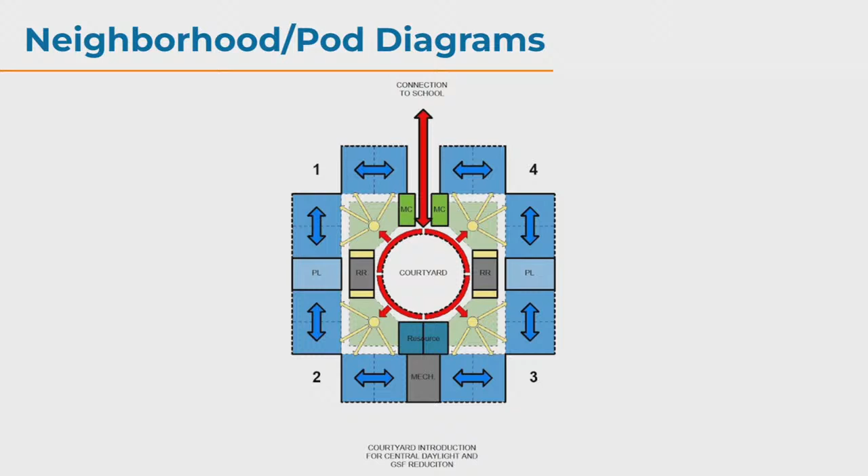So as this has evolved, we focused on trying to get things in their right size. We've got some science labs located, 1 per pod, so it's really a team teaching model. We've got interdisciplinary teachers, students working all in their pods. We've honed this through the process of design.

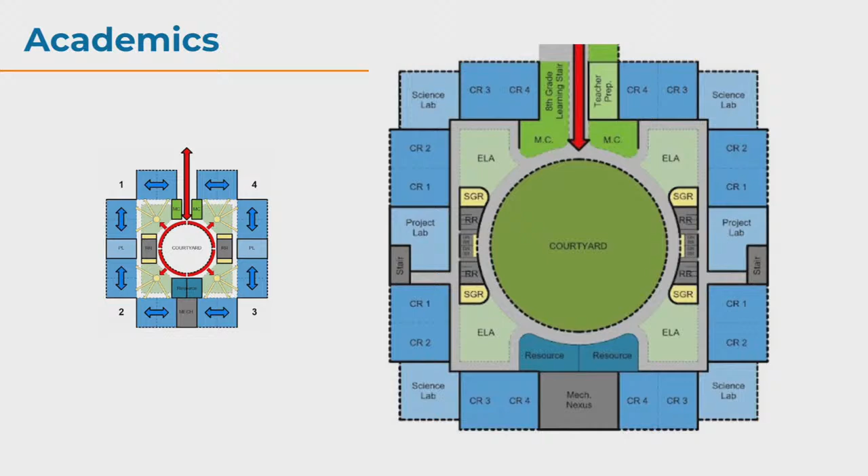You can see this is kind of where we're at right now, and I'll toggle back and forth to see how the diagrams have evolved. But you can see that we maintain the basic organization, the square shape.

As you zoom in on the 1st, 2nd, and 3rd floors, we can see we've got the 4 blue classrooms there, including a science room on each of the corners. Our science rooms are standard sizes for 6th, 7th, and 8th graders all the way up. It makes it really easy to stack, and really flexible in the event that we want to move the 6th grade from the 3rd floor down to the 1st floor in the future. We've got the flexibility for that future ability for them to grow.

Some of the things that we've done in terms of anticipating potential growth in the district is enlarge the resource rooms. Those were previously programmed at about 600 square feet, an OFCC standard. We've enlarged those so that they're a standard size classroom.

That will allow, if we have a bubble in terms of the student population when they come up through elementary school, that if they come in and we exceed that 120 student per pod group, we can have that additional classroom dedicated for an extra large class, and those students will be able to move through 6th, 7th, and 8th consistently all through here. So we've designed some things like that will allow the building to be a little bit more future-proof, that it will grow with the students and the student body as they grow.

Because of the way we've organized these with the pods, we're trying to embrace this teacher collaboration area. We're working such that the teachers will have their classrooms, and that's something that's going to keep evolving as we go through the design development process. But we also want to make sure we have a teacher collaboration space, a space for the teachers where they can get outside their classroom and work together, especially as we think about this teaming model and team teaching and project learning.

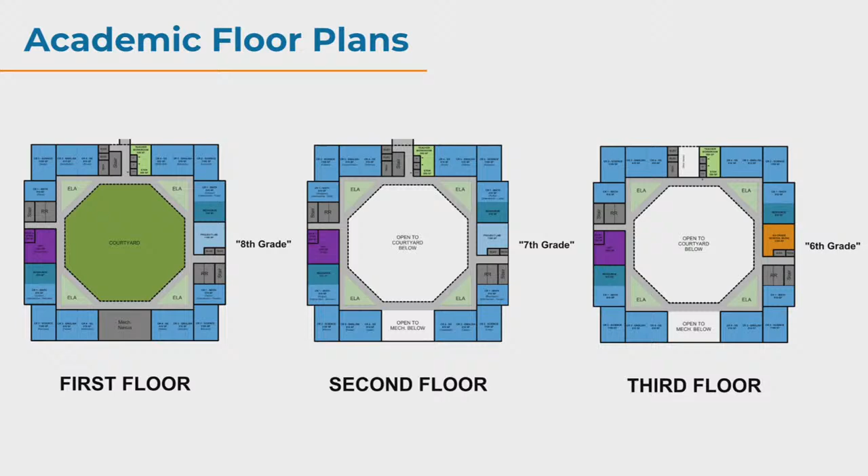This is how the academic areas fit within the overall floor plan. You can see that we've got the academic areas organized on one side with these connectors that connect to the common spaces on the first and second floor. On the second floor, we've got our elective spaces. So these are all of our general education classrooms: math, science, social studies, history, language.

All of these spaces are more of our electives, so we'll have foreign language, robotics, and other spaces located here for all 6th, 7th, and 8th graders, so they'll have the flexibility to go there. These being located on the second floor means that whether they're coming from the upper floor where 6th grade is or the lower floor, they really only have to go to one floor to get to those electives, so it's pretty convenient and easily accessible for everybody.

The green spaces located in these corners are our media center spaces, so those will be more open spaces for students to do research, collaboration, projects, access to book resources, digital resources, anything they need, in the media center spaces at the top. There are some stairs that will connect down into our dining space right in the center here, so those will be easily connected. The students will have a lot of flexibility to go from the lower level where the dining is, even if they're not dining in the middle of the day, they'll have access to this whole large open space.

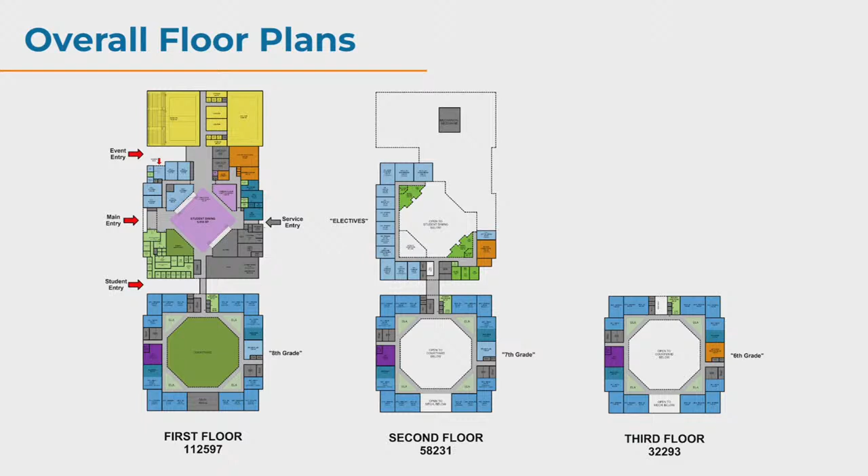Does that make sense? Okay.

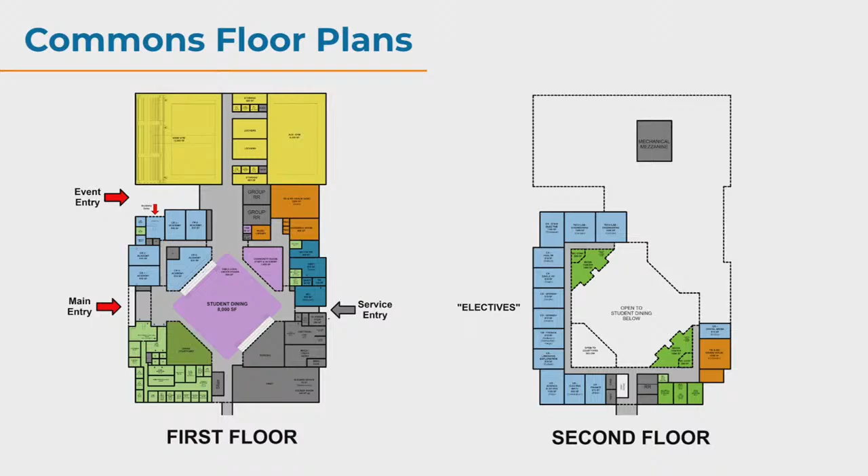So as we zoom in, we can see a little more detail here. These are still just diagrams. We have a whole production model that has all of our doors and windows and everything starting to go into it. You can see a little preview here of that model relative to the existing campus, and these are just rough extruded blocks for the existing high school and the existing junior high.

So this is really mostly just to give a sense of scale. As Charlie mentioned, this is a big building. It's going to take more than 2 years to build.

At a little over 200,000 square feet, it's a big building, but we've designed it so that it's off of the main street, tucked back in. We'll have access to parking, and our play fields and stadium are right behind here. We're going to have some existing parking here that we'll maintain. Some practice fields will go in place of where the existing junior high is once that's abated and demoed.

In Charlie's schedule that you saw previously, it starts in 2025 and will go for about a year before this building is abated and demoed and replaced with play fields and parking. So this gives you a little bit of an overview of that.

As we zoom in, you can start to see fenestration patterns, windows, because of the construction conditions we're dealing with right now with budget concerns. We want to honor the budget we've set for us, so we're being very mindful about how big the building is, trying to keep things as tight as possible. We're trying to make sure the building is very efficient, both to move through and to construct.

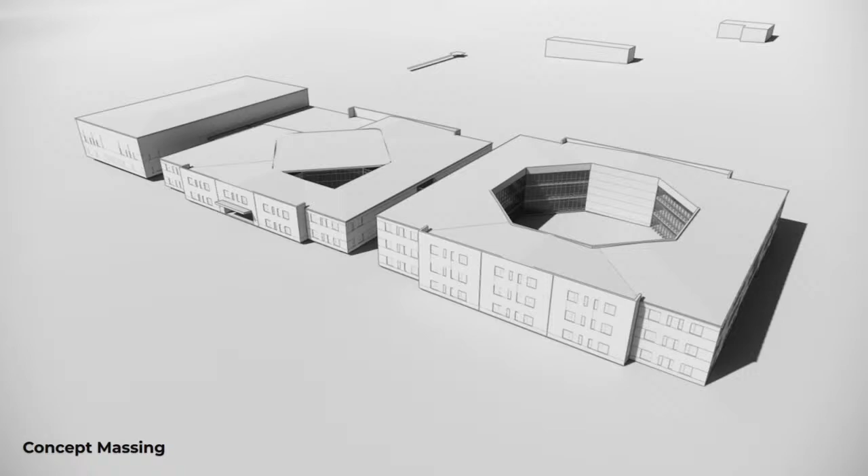So you see a lot of repetition in some of these window patterns. It's still going to be exciting, I promise. That's my job, and all of our jobs, to make it exciting, a great place for students to come and learn every day, including the summer. That's important, but we're trying to be very mindful of the budget, schedule, and ability to construct this in a reasonable time and manner.

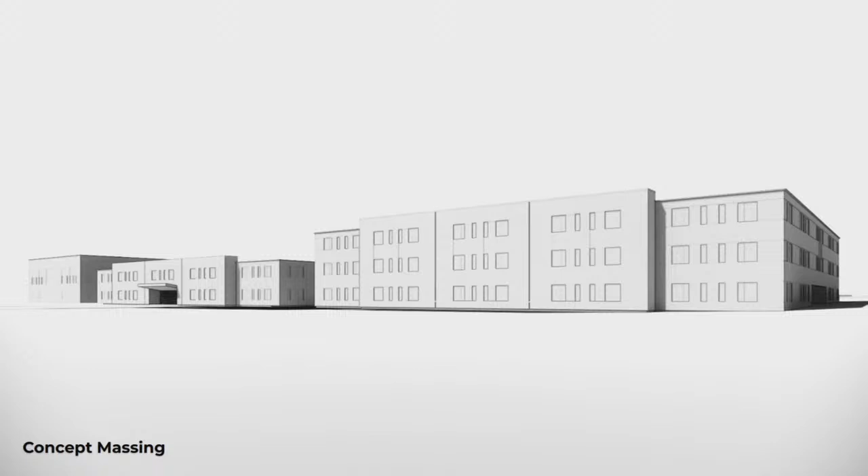From the ground level, you can see the 3-story academic wing here on the right, the main entrance with our admin, the academy, and the electives above, and then finally the taller volume on the left with the gymnasium. We'll still have some daylight in there to get into those gym spaces.

One thing we're working through right now in our site design process is the relationship of the new middle school to the future field house. This is something we're talking through and how we can phase that. Is there anything you want to say specifically about this, Charlie?

Just looking at the connections and making sure that operationally they function. I think the thing we'll point out is our site plan is tight, so we want to make sure we're doing it in an efficient manner for operations and building.

We're going to be building this whole thing on those 3 practice fields adjacent to the stadium right now, so we have a very limited footprint. Even beyond that, we want to preserve some outdoor space for education, parking, and play fields. So it's something we're thinking about, not just what's happening inside the building, but what's happening around it as well.

So this will be kind of a service drive area. We'll have our service entrance here for deliveries, both food deliveries and mechanical service deliveries. Most of the people coming to the stadium will be coming from the east here where the parking is, and they'll have concessions and restrooms up here before they go into the stadium to the north.

The potential field house, with 3 additional gymnasiums here, is part of a future plan. We're just making sure we're mindful of that as we go through this master planning process, leaving room for that in the eventuality we get there sometime in the future.

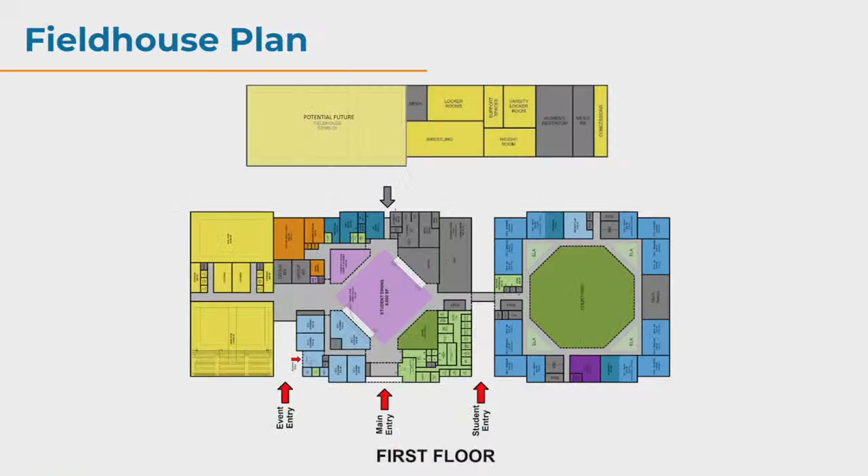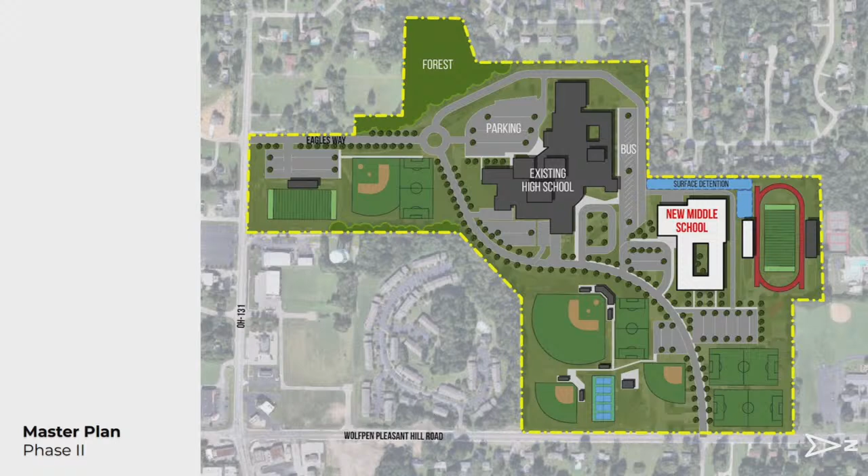We'll still have buses serving both the high school and middle school coming down in between. We'll maintain and maybe even grow some parking here to the east so they'll have access. And as we look at the overall master plan, we might try to put in some additional play fields since things are getting moved around, so that's all part of what we're looking at at this 30,000-foot level.

All right, so what's next? We've got some detailed technology meetings where our technology designers will talk with your basic CIO-type folks about Wi-Fi, network, teacher technology, phones, PA systems, emergency call buttons, all the things associated with a new school. It's a robust agenda.

Security meetings — we will be having detailed security meetings once we have a site plan and a floor plan to look at. We will involve the Miami Township Police Department, fire departments, district security folks or school resource officers, and administration. It will be a robust group, and we take it seriously.

In every single project, when things are happening, we try to learn from those and apply the knowledge we have. So Greg talked about the barriers and containment — that's one big strategy. A building of this size will have probably 200 cameras throughout it, inside and outside. There's a lot of active and passive measures that'll be incorporated, and we'll share more as we can.

Site design meetings — as Greg mentioned, we're working with the civil engineer, but we want to start folding in your transportation folks, even your band instructor, to make sure there's practice space. All the folks living on the site will get a chance to chime in and see some of the decisions being made — Eagles Way, the fields, utilities, stormwater, electric. There's so many things associated with the site that become very critical to your operations.